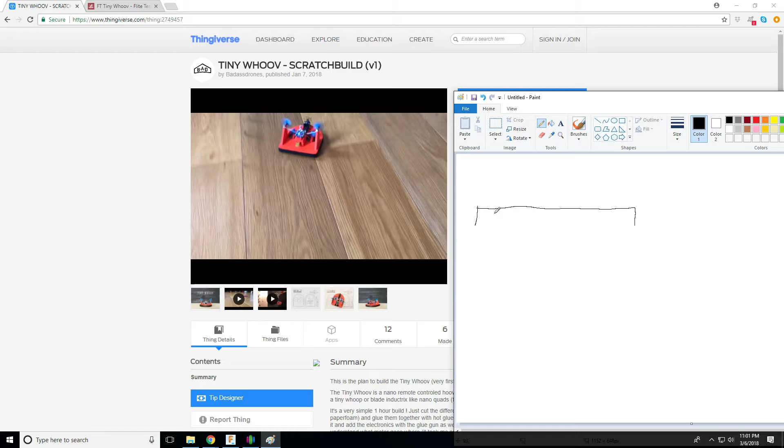Let me turn off. So here you could see sort of how it works. If you guys are not familiar with how a hovercraft works, let me show you while this video is playing. So here's the bottom. I'm going to kind of go over the engineering of a hovercraft. Basically what you have is something that sits flat on the ground. Generally these are without skirts, and we'll go over what a skirt is in a second.

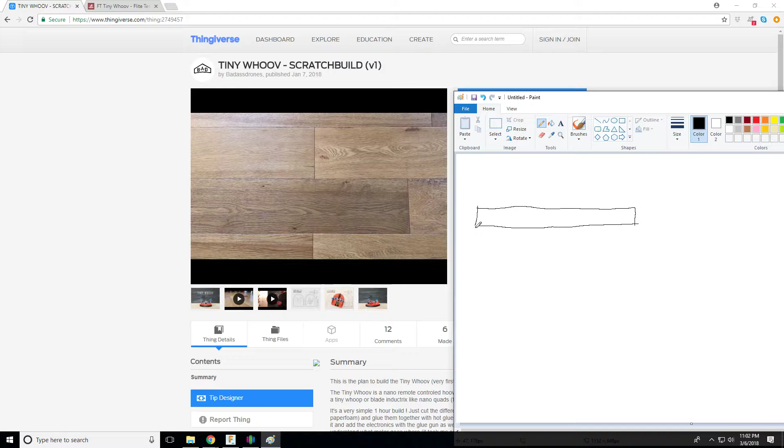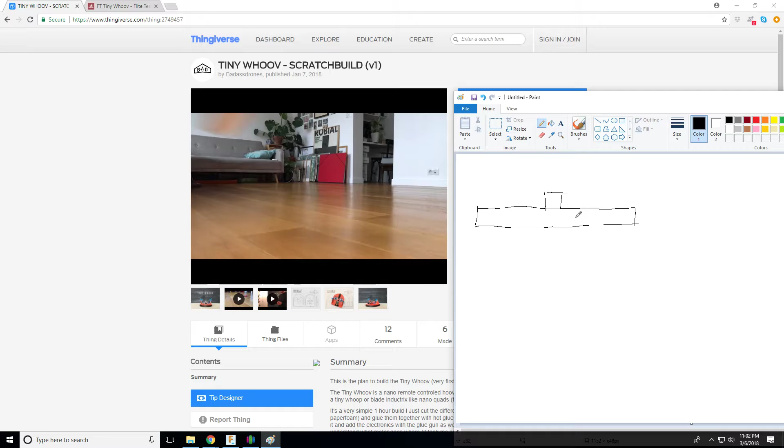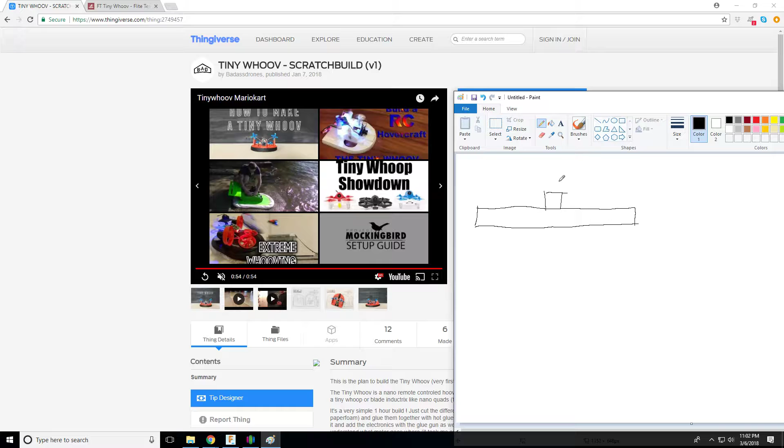A lot of times the first project you guys have with a hovercraft is a disc. People take a CD or DVD disc and put one of those caps from a water bottle on it, and they put a balloon onto the nipple of the cap and fill it full of air. Then when they pop the top to let the air through, with this sitting on a table, it'll actually hover.

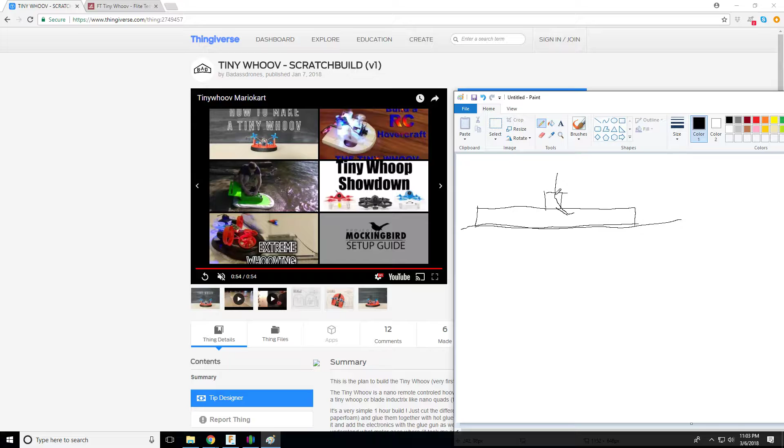So basically what is happening is the air is pushing down, and at first you have a high velocity. The tighter something is, the higher the velocity, but the lower the pressure. The bigger something is, the lower the velocity, the higher the pressure. So the air rushes in here, and when it changes from this area to this area, the pressure increases.

And then these are the second stage, which is, oh man, it's really hard to write with the mouse. So as this guy decreases, the pressure's got to increase. So as the velocity is higher and the area drops down, then that means that the pressure has to increase, and velocity is going to decrease, I guess you could say. That's kind of a bad analogy, but you get the idea.

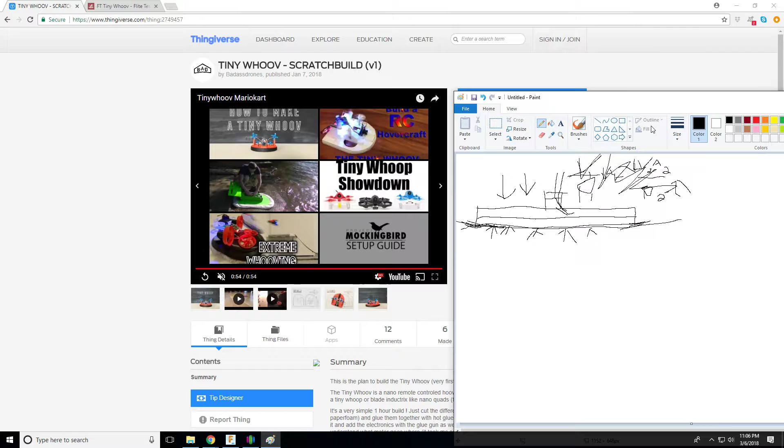So basically, this disc is now hovering over the ground very, very slightly, so it's just like an air hockey table when you play air hockey, that instead of the hockey puck blowing down, the table's blowing up, and the puck will sit on a little cushion of air.

So what you notice is, let's say you're at a resort or whatever, and your quarters run out. First you were playing and it was really smooth, and then all of a sudden the quarter runs out, and you can't really play anymore. You hit the puck and it just goes a few feet and then it stops. While before you could hit it and it would bounce to their side back to your side like twice or 3 times.

So basically the rolling friction against the ground is now eliminated because it's not touching the ground. So now the only thing slowing this thing down is air resistance, because it is no longer in contact with the floor. It's only in contact with the air above the floor, which is wind resistance, or fluid friction, in this case air friction. So what that does is allows you to go very, very fast.

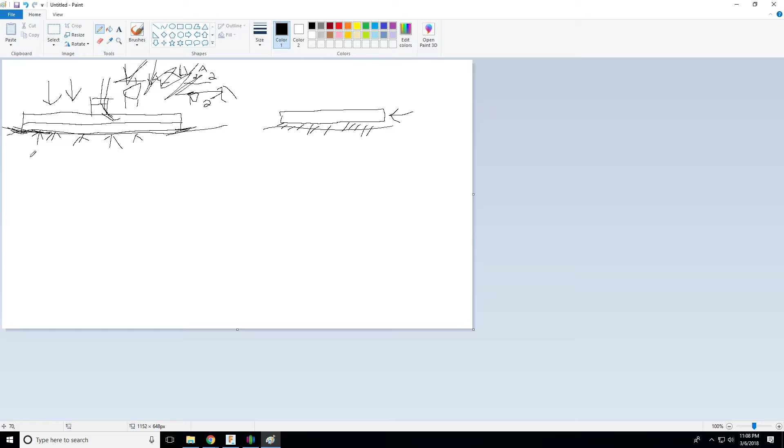Now, some of the hovercrafts will have a skirt. As you notice, this will only work on a flat surface. Now, if you took this guy and you had a little bubble here, this is going to drop your pressure because there's a bigger area right here. Well, in this case it's volume, right? All your air is going to rush down here, and because you have a bigger volume to fill, your force going upwards is going to drop.

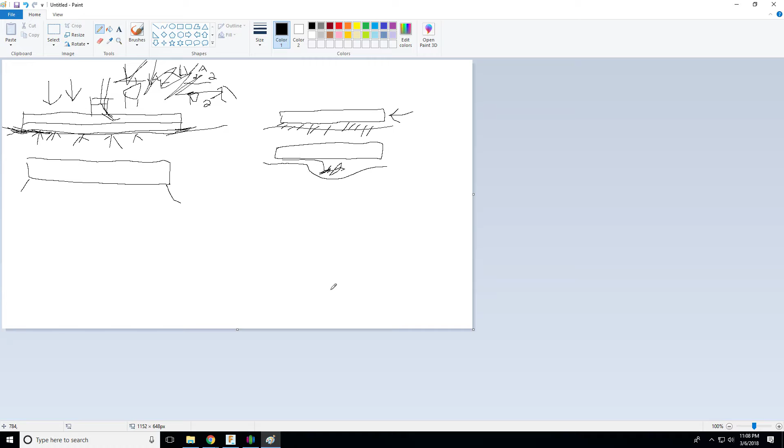So if that was the case, next thing you know, your hovercraft is no longer hovering because you lost all your pressure, because you lost all your upwards force. So now you have a collision there, and you have a collision at this high spot. Also, it's no longer escaping from just the edges around the diameter of the disc. It's escaping throughout this big crack right here.

So if you only have a flat disc with a flat bottom, or any hovercraft with a flat bottom, it's only going to work on a relatively flat surface. For example, at my house I have grout lines in the tile. That might be okay, but anything deeper than that, you're going to have problems. So some of the hovercrafts still work over sand, water, other land, snow, pretty much anything, right?

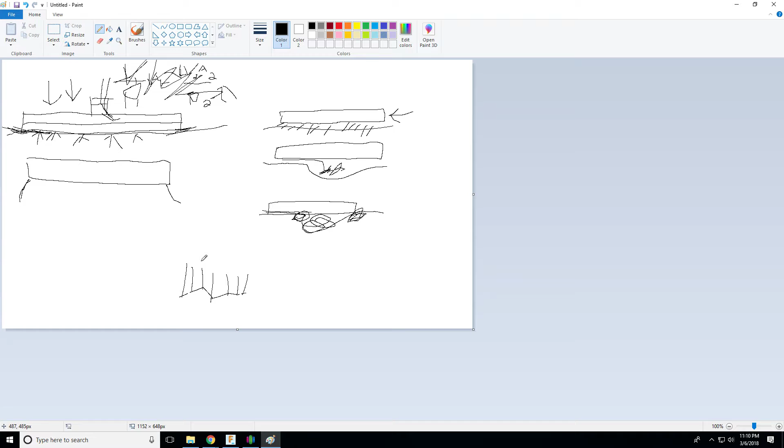But what they have to have is what's called a skirt. What the skirt does is it keeps the entire side, and generally these are like strips, right? These are like stripped pieces. See, they look kind of like that, right? And basically it looks like a skirt, like a girl's skirt, and the girl's skirt theoretically, you have to think of it, isn't continuous. Imagine if you cut it into strips so that it would contour to something, right? So it's designed to contour to the ground.

So even if you had a bump in the ground, it's still sealed. See, it still has full contact there, full contact there. So the air is only escaping through the bottom here, and you're keeping all the pressure underneath. So you're not getting any leakage of your pressure out the side, because you want to keep that pressure underneath and have as little of it escape as possible. So a skirt allows you to go over variable terrain with ease, while a flat bottom will only allow you to go over flat terrain.

So that's how a hovercraft works. You're pushing air down through, and it escapes to the side. The pressure change from the small orifice to a big orifice will increase the pressure, and that pressure is force over area. The pressure is higher on the bottom or inside the hovercraft than it is outside, so it's going to lift the inside of the hovercraft up towards the place of low pressure until the pressure equalizes. Because you have that lift away from the floor, you no longer have rolling resistance or friction. So now only wind resistance is affecting your craft.

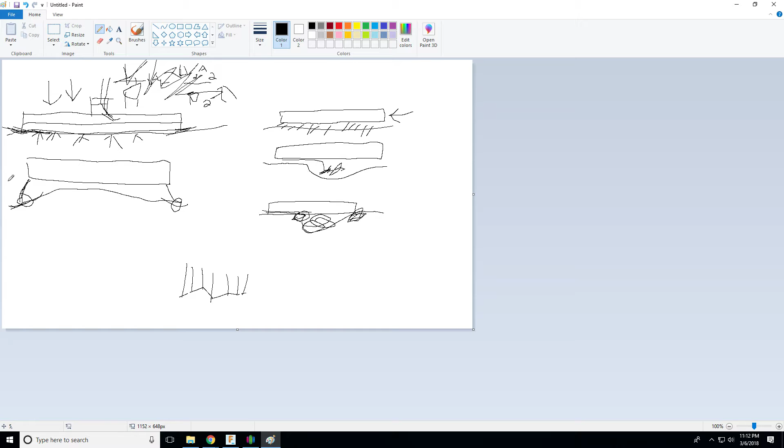So how do we do that in a Tiny Whoop? Some of the Tiny Whoops have no skirt, and some of them do. Obviously, the better ones are with skirt, but it really depends on what you're trying to go on. What we're going to be trying to build first is one that works on tile and hardwood floor, which is 99.99% flat, so we're not too worried about that. Okay, so as you can see here, these ones do not have any skirts. These ones are wholly flat, and this here is just a piece of tape, I think, wrapped around just to change up the color.

As you see here, it's kind of got this D shape, and if we could pull up the Thing files, they don't have a Thing file for it. Let's look up some other Tiny Whoops. Let's look at that one. This one will be pretty good. Let's go into Thingiview. It's going to load it up so we can look around the file, and you see exactly what I'm talking about here. So here's where you would contact the ground, and here's where the pressure, the air, would be caught.

And basically what it does is it uses two of the Tiny Whoop motors, or Inductrix, or Furibee F36, or Eachine E010, or whatever you're using, to push air down through this orifice. This is not going to be a lot of pressure, but when it changes from this area to a bigger area, it's going to increase its pressure. So here we're giving it a lot of velocity, and then the velocity is turning into pressure, right? And we have two of those.

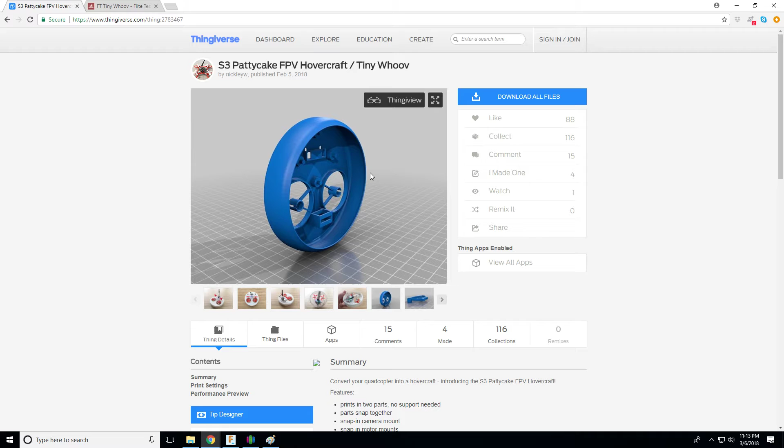Then when we do that, it's going to pick up off the ground just slightly. It's going to find an equilibrium where it's just slightly above the ground, and then the air is going to escape from around this guy, which we want. So now we're hovering over the ground. Now we could maneuver. So we have a left and right motor. Now, the board built into the Inductrix slash Furibee slash Eachine slash Tiny Whoop, whatever, has differential control for left and right.

So when you go on your stick, what it's actually going to do is the right motor is going to spin faster than the left motor, and that's going to cause you to turn. And if you turn left, this motor spins up faster, so you have this one going this way, this one not moving much, so it's going to turn around this way, right?

Let's look at it straight up and down. Do they have straight up and down? No. I mean, there's this one, yeah, but it's flipped. Anyways, so if you turn left, this one spins faster. If you turn right, this one spins faster.

And there you go. Now this thing will go really, really quick because you have no resistance against the ground for friction. And since you're inside, you don't have any wind blowing up against you. You're not really going that fast. You don't really have anything slowing you down either.

However, out of the box with this kind of programming, which we'll probably get into optimizing the programming for Tiny Whoovs, whenever you bring down the throttle to control how much air you're pushing down or going forward, it's basically going to suck back down into the floor because you're no longer putting any pressure into this bottom cavity, and then you're going to come to a complete stop.

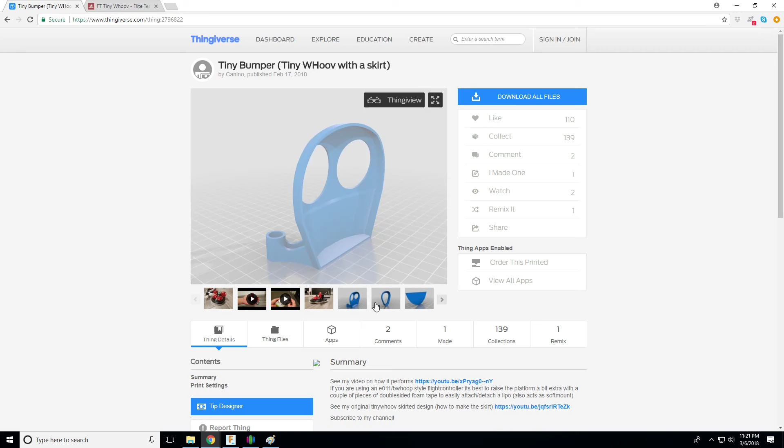Or could we get it to where the throttle is not even attached to these guys anymore and just attached to the back? Or is throttle not even involved? You just arm it. When it's armed, it's enough to fly, and then the farther to the left and the farther to the right you go, the more it will speed up, or some sort of different mixing. So those are some ideas, and so we're going to be looking into those.

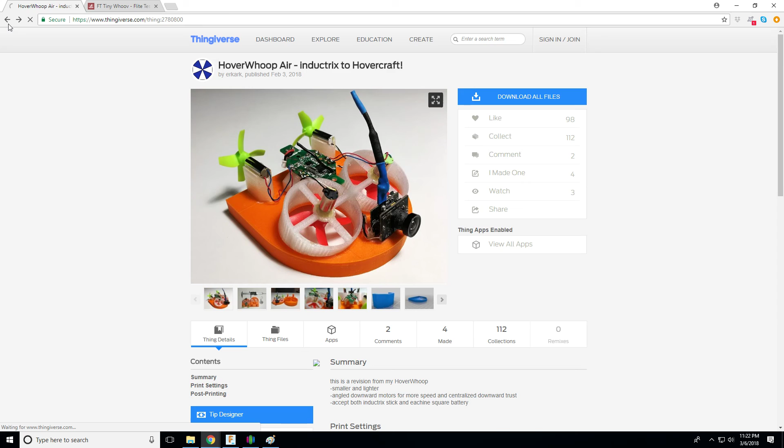But yeah, I hope you enjoyed this video looking at a few of these different designs, and you can kind of see that they all have a similar thing going on. This is another thing we have to avoid, is the warping of the material there at the bottom. Alright, and here's some other ones where they're directed. So I guess this way you have a force downwards, and technically you have a forward thrust from that downward angle. It's one way to do it, where you get downwards pressure as well as mass of air accelerating one direction, causing you to be pushed in the other direction. Anyways, we'll look into it.

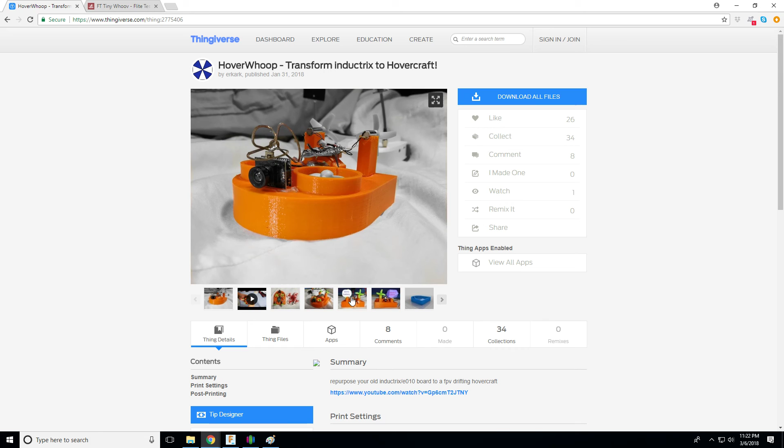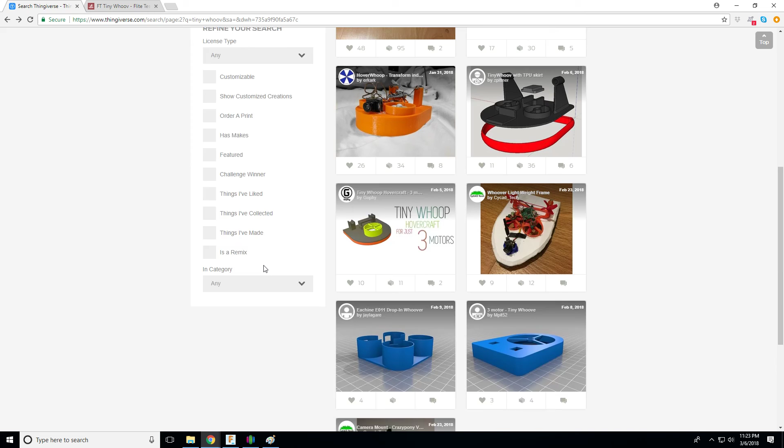And we have a few different boards. I have a broken Nano QX. I have a Furibee F36 that I need to do. I have this V1 BeeBrain, which eventually I'll get a V2, and so that guy's programmable. Put it on this guy to mess around, because it does have some problems with low voltage gyro freaking out. And here's the ship. Alright, so that's pretty much it for this video.

I got work here in the morning, so I gotta hit the sack.

Anyways, so this is just an intro to the Tiny Whoovs. I'm really excited to build one. I've been wanting to build one for a while, and I might even like it better than Tiny Whooping, because my house that I live at is really optimized for this. We have flat spaces everywhere, and very little carpet, so it's just perfect for what we're trying to do.